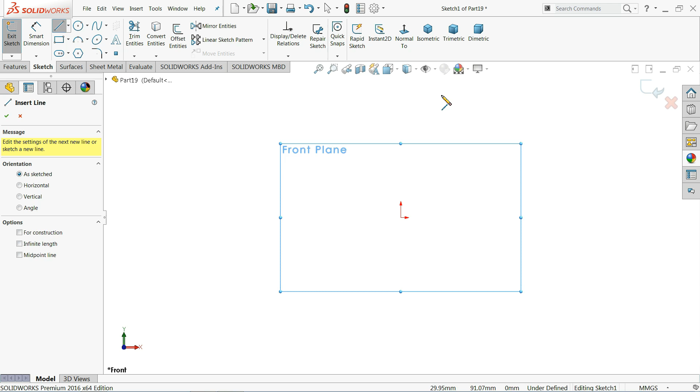Exit. Now here we will make some relation. Select these two lines and make relation collinear as well as equal. Two relations we created. The same we will do for these two lines, collinear and equal. That's it.

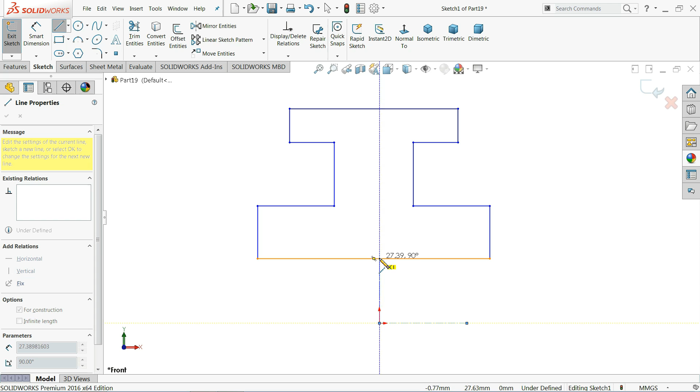Horizontal and vertical line connect with this center line. See, we connect this center point. Select this line, make relation vertical. Now this is in perfect position. Let's define.

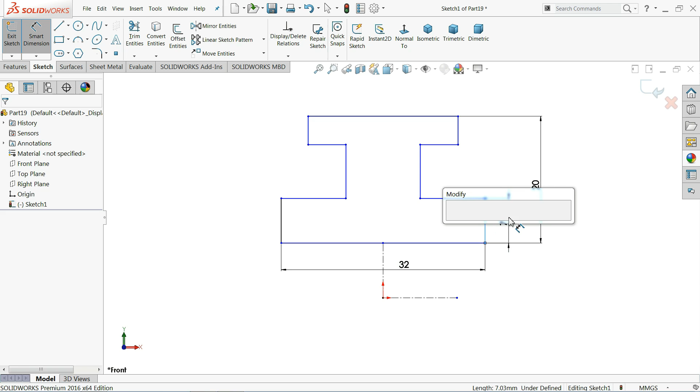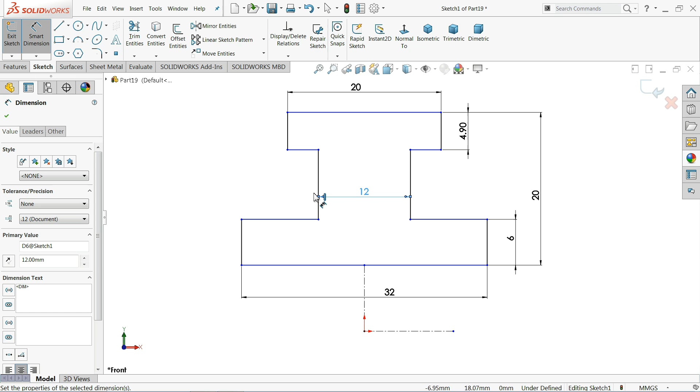Keep overall width 20 millimeter, 32 millimeter, 6 millimeter. This one keep 4.9 millimeter. That's it. And 20 millimeter. This one 6 millimeter. Okay, the middle one 12 millimeter. This one also 6.

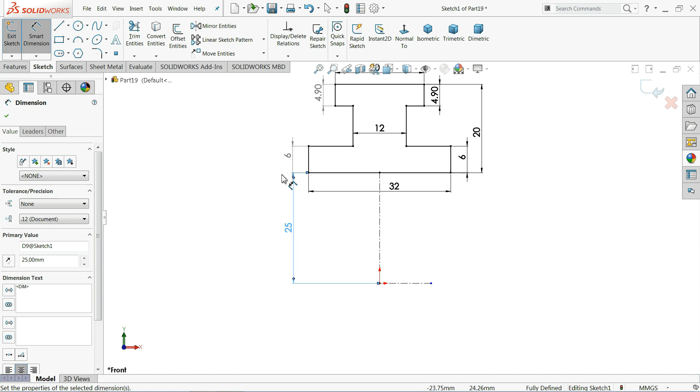Distance from here to origin point. This is the important relation, 25 millimeter. See, now see, our drawing is fully defined.

Go to feature, select revolve boss base and select this vertical horizontal line. You can see the preview. We don't want full circle, we need half circle. So here we will choose 180 degree. Keep end condition blind.

You can see the preview. Okay, look, real view. Select this face, sketch, normal, select circle, and here draw a circle.

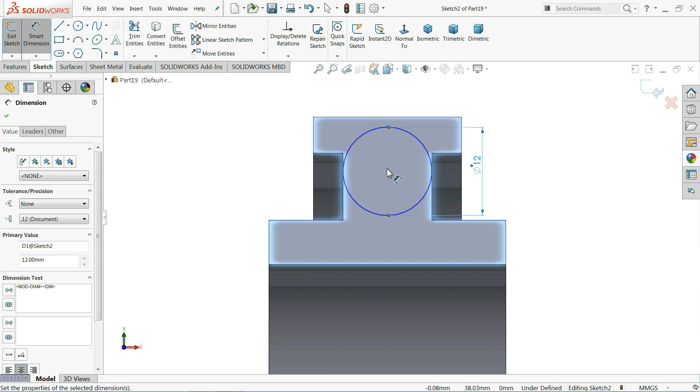Diameter 12 millimeter and distance from outer edge 9 millimeter. Okay, and let me define one important relation. Select the center of the circle and origin point and make relation vertical. Now see, go to feature and extrude.

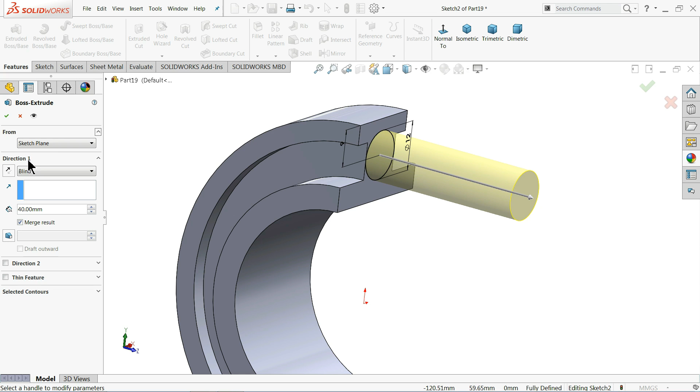Extrude up to 40 millimeter. Select reverse direction. You can see. Okay, that's it.

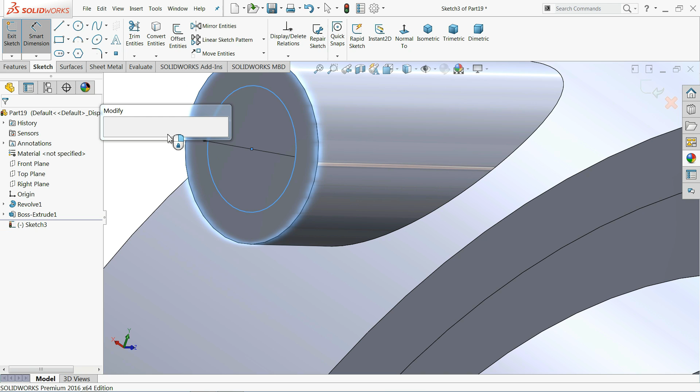Now select this face, sketch, choose circle, and here we want to create a hole. So center point, circle, smart dimension, and let me define the diameter 8 millimeter. Go to feature, select extruded cut. Now we want to make an extruded hole. Keep end condition through all. Okay. Now see, the hole is created.

Choose fillet. Keep 2 millimeter, and I'll choose this end. Okay, again I'll choose fillet, 1 millimeter radius and select this end.

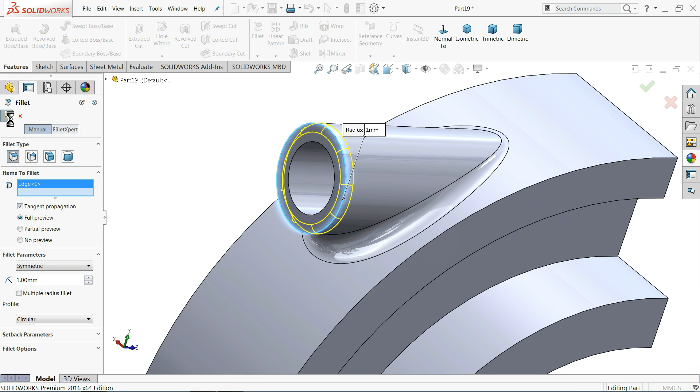Okay, now let's mirror this feature. So how we will do this one? I'll choose here top plane, mirror. First I'll select this extruded part, then I'll select this hole, then select this fillet and this fillet. Now all these 4 patterns we selected here, you can see the preview. Okay, now see, it's mirrored.

So this is your simple part 2, connecting rod lower. Let me define some material or some color.

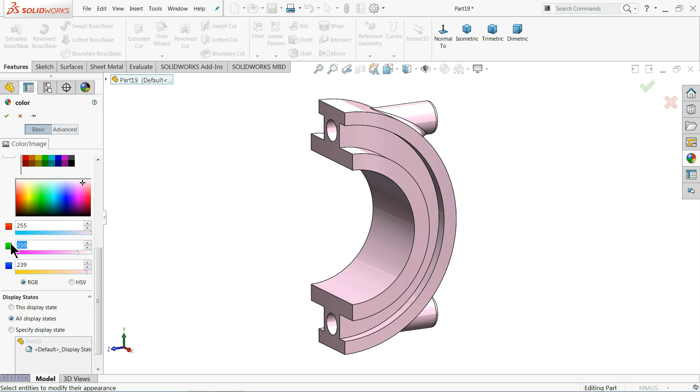255 and here 67, 19. It's like a dark orange. See? Okay. If you will check off the real view, look, it's perfect.

Save. Connecting rod lower. Okay.

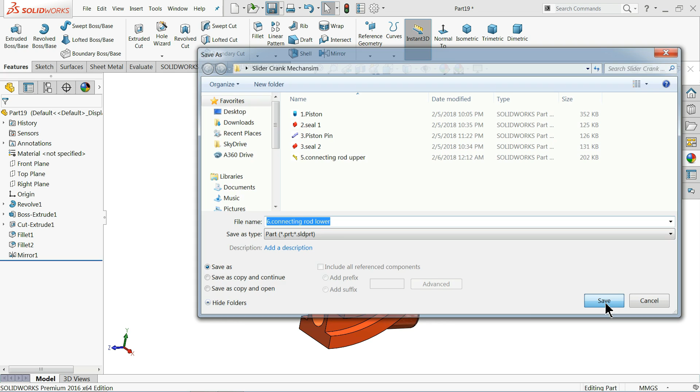Now let's make the next part, plummer block bearing lower part. So let's start. We will start with top plane. Sketch.

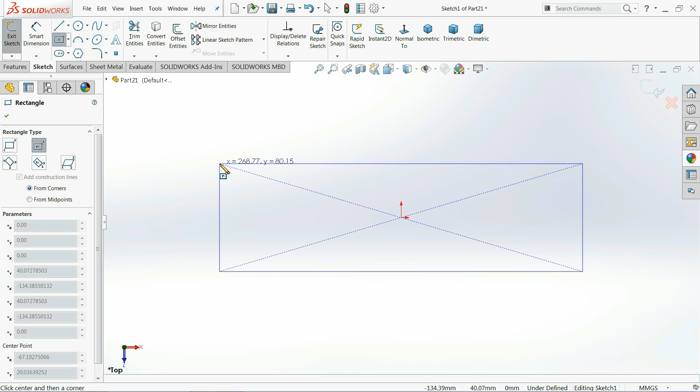Center rectangle. Draw a center rectangle and let me make the length 140 millimeter, 35 millimeter. Now extrude, and we need to extrude up to 20 millimeter.

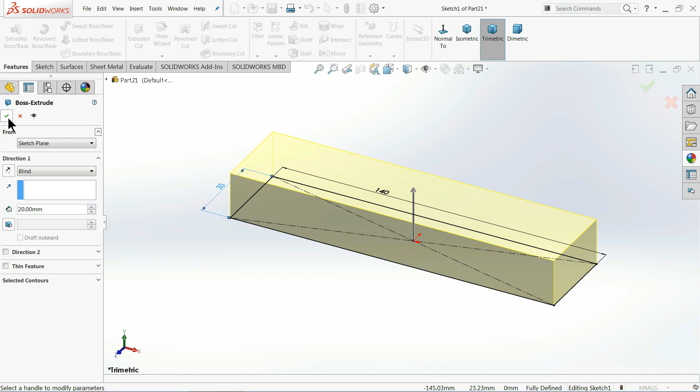Okay, that's fine. Now select this face, sketch normal, choose circle, and let me draw a circle.

84 millimeter. Okay, now select this line, convert entity, this outer line, convert entity, choose here trim entity, power trim, and drag, delete. Okay, now see this portion is created, exit.

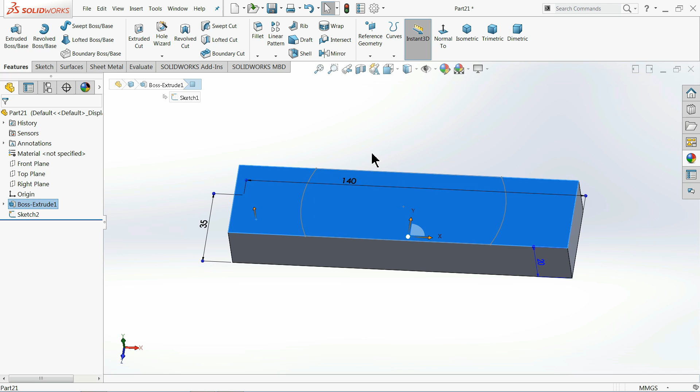Now select this plane. We want to create the same thing but 30 millimeter above this surface. Select this plane, 30 millimeter above. Okay, now select the same plane, sketch circle, and let me draw one more circle, and here let's keep the diameter 80 millimeter.

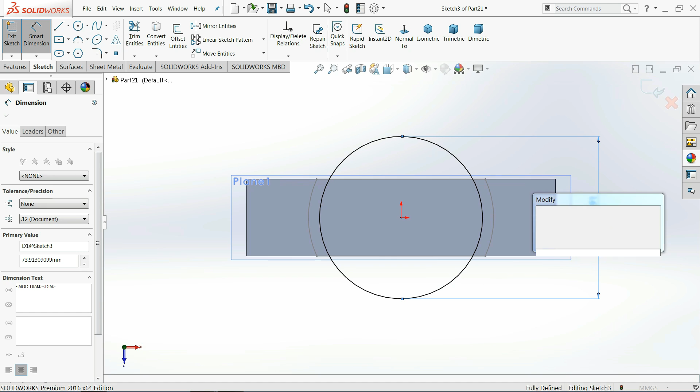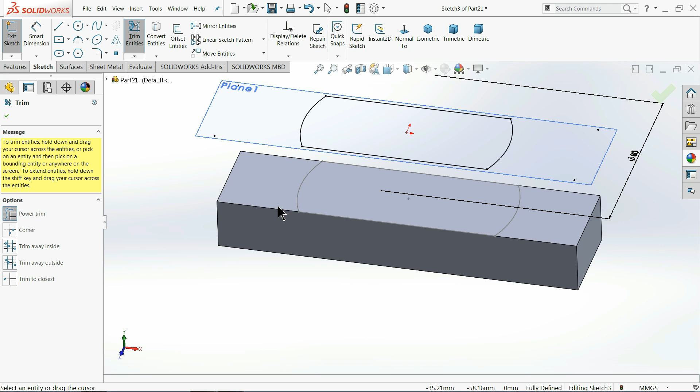Now select this face, convert entities, choose trim entity, power trim, and now see we got a beautiful structure. Okay, now exit and just go to feature, and here you will find one option, lofted boss base.

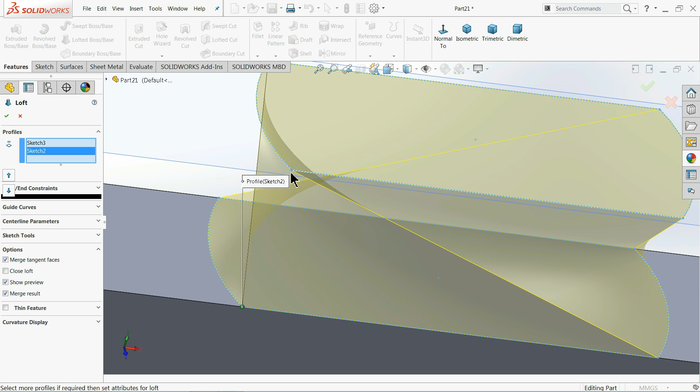Now see here one edge is selected, so select this other edge. Okay, we need to drag the edge, just drag this one up to here. See, these two edges we selected, no need to check any other things. Okay, let me hide this plane. Look, this is beautiful.

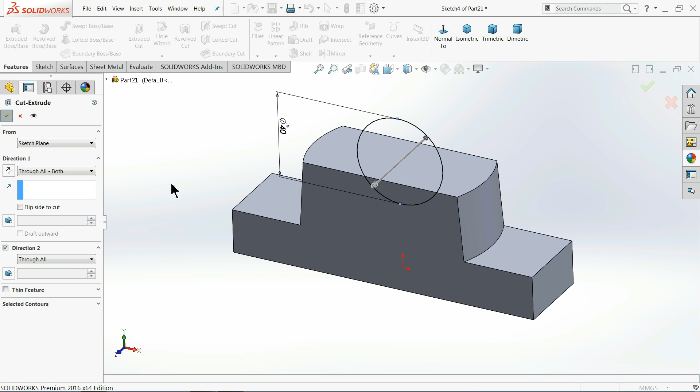Front plane, sketch normal, circle, and let me draw one circle. I want to make a hole here, so 40 millimeter. Go to select extruded cut, and here keep end condition through all both. Okay, now see it took the perfect shape.

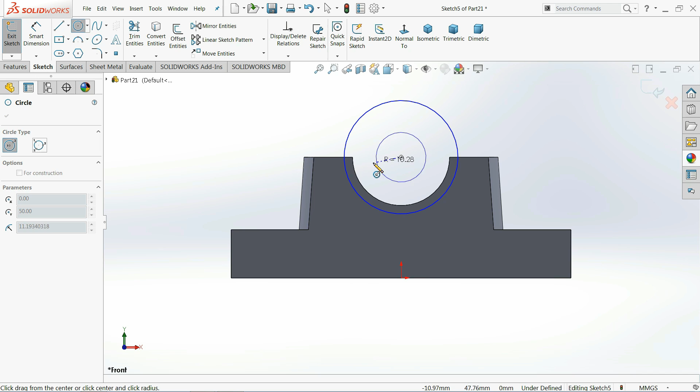Now again we will make same plane, sketch front plane, sketch, and let me draw two circles. One is similar to 40 and one is bigger, 50 millimeter, 40 millimeter. Okay,

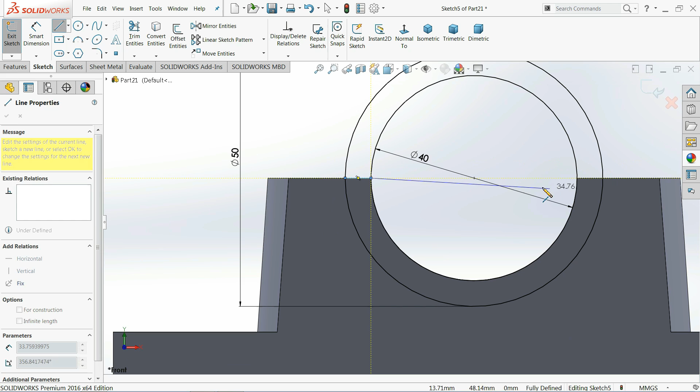Choose here line and connect these 2 points. And here also connect. Trim entities, power trim, just left key and delete.

Okay, this one no need dimension, it is fully defined. Okay,

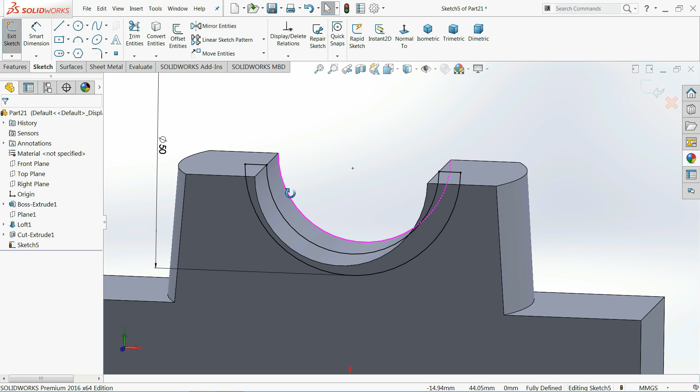Now select here extruded boss base. We extrude only 3 millimeter. Select offset and this time make 20 millimeter. No, not 20 millimeter, this is 17.5 millimeter, because our thickness of plummer block is 35 millimeter. Okay,

Now I'll choose again the same sketch, extruded boss base, offset 17.5 millimeter, make reverse, and here also 3 millimeter blind condition, end condition blind, and reverse. See, here is going this direction. Okay,

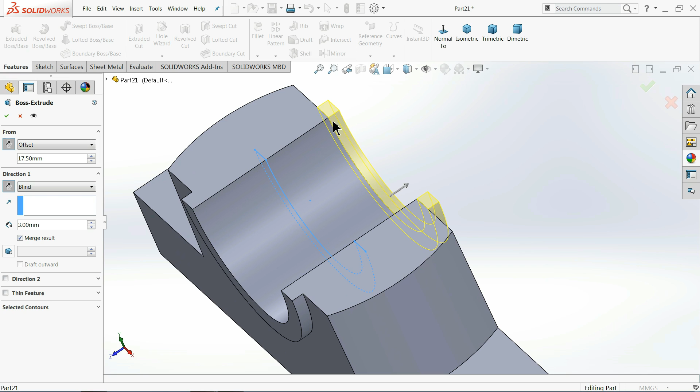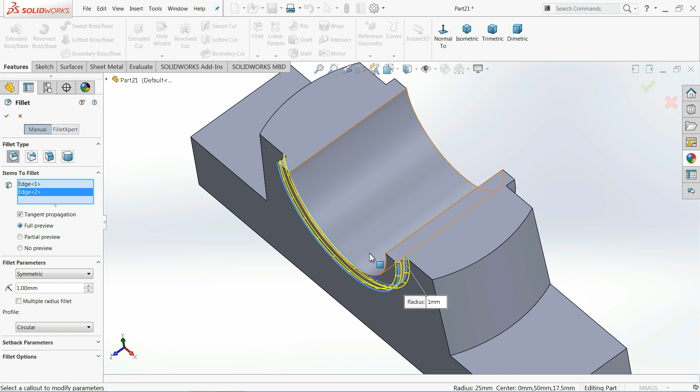That's it. This is what we like to make fillet. 0.5, and let's try these circles. Okay, let's try 1 millimeter. Okay,

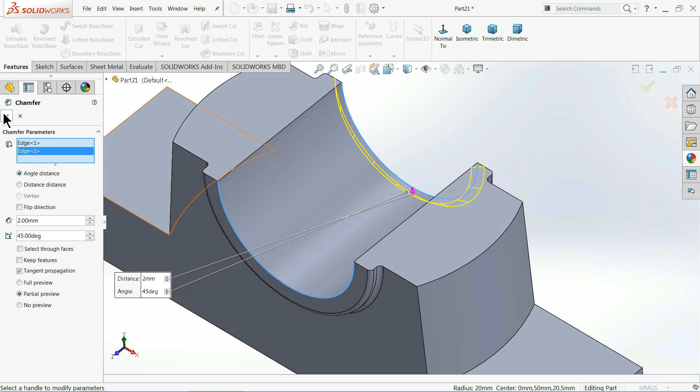That's perfect. Chamfer 2 millimeter and 45 degree. I'll select these two edges. That's nice.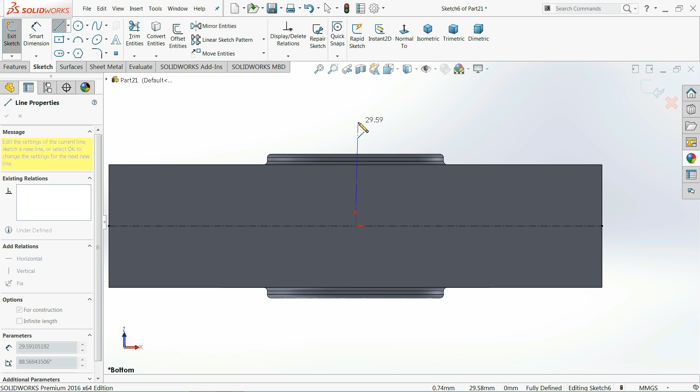Now select the bottom face, sketch normal. Now here we will make some, choose center line, draw one end to other end, and draw one center vertical line also, circle, and let me draw here 2, 1, 2.

Okay, let's draw it, no need to mirror. Smart dimension, 12 millimeter, 13 millimeter, and this one 11 millimeter.

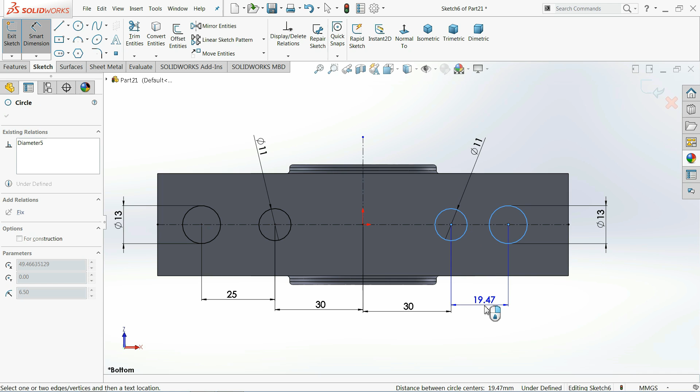Now let's make both the gap 25 millimeter. Now this distance from origin point 30 millimeter. The same here, 13 millimeter, 11 millimeter, 30 millimeter, and the same, the last one 25 millimeter. Now it is fully defined.

Select here extruded cut and keep end condition through all. See, okay,

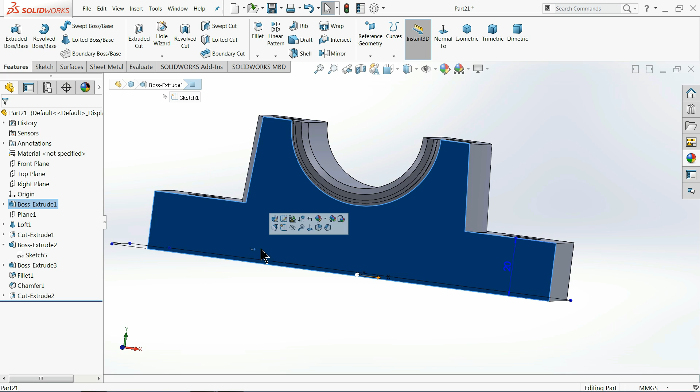That's it. Now here we want to make some cutouts, so how we will do this one? Select this, okay, this face, sketch. I'll choose here corner rectangle, exit. Now select both the upper line, collinear and equal. That's it.

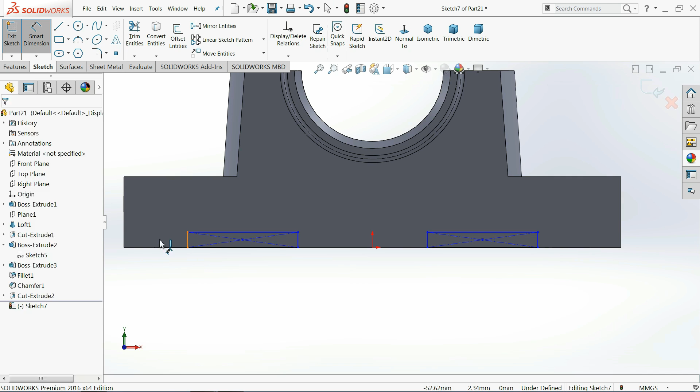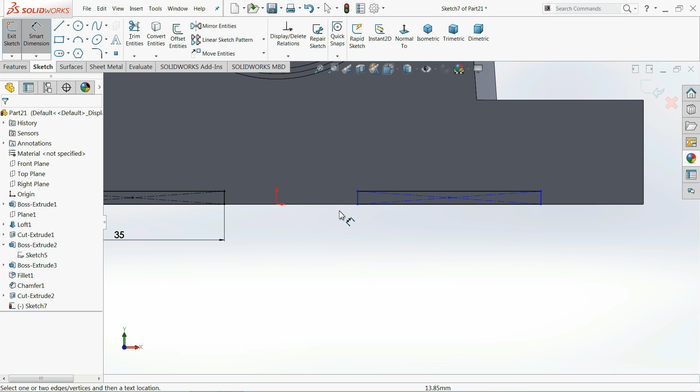Let's define this dimension. 25 millimeter, 2.5 millimeter, and this overall length 35 millimeter. Now let me, okay, this one also define from this end. 25 millimeter. Now see, it is fully defined.

So select extruded cut and here keep end condition through all. See, okay. Now see, the hole here is created. Keep real view on, plain white. Now that's look perfect shape.

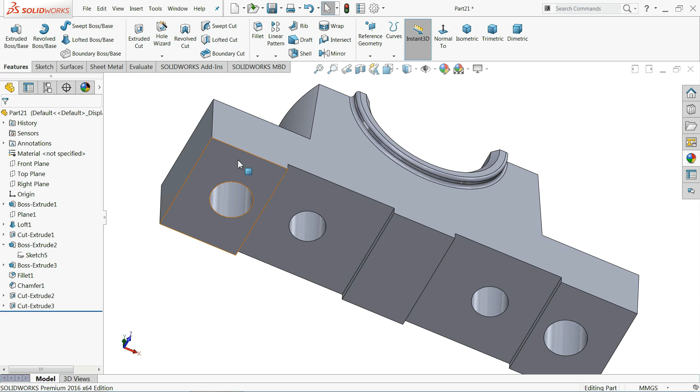Now let's start to make some holes at the bottom. Select this inside sketch normal, and here we need to make some more holes. Select circle. Here also draw one more circle. Smart dimension and define the diameter 20 millimeter.

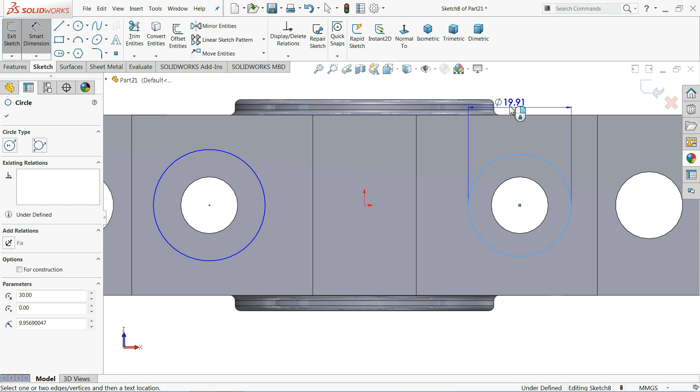Feature, select extruded cut, and we want to make a little small depth. Make cutout 5 millimeter depth. Okay, now see.

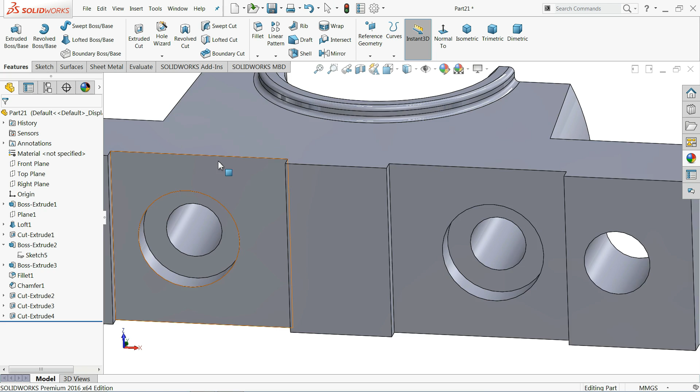Now select this top face, sketch circle, center point circle. The same thing we have to do for this - center point and circle. Now for this one, 20 millimeter.

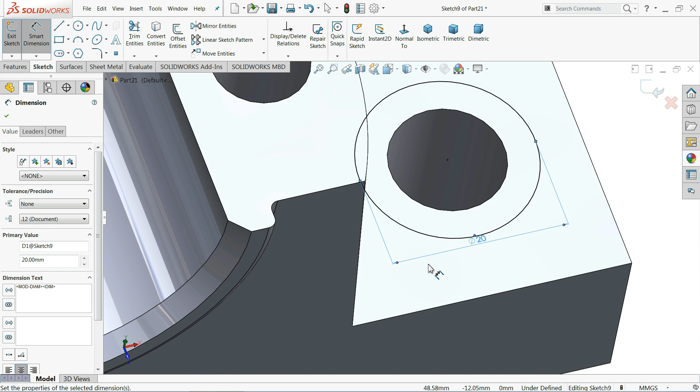Now select extruded cut, and this time we will make the depth only 2 millimeter. Keep blind and condition 2 millimeter. Okay, now that's our simple hole.

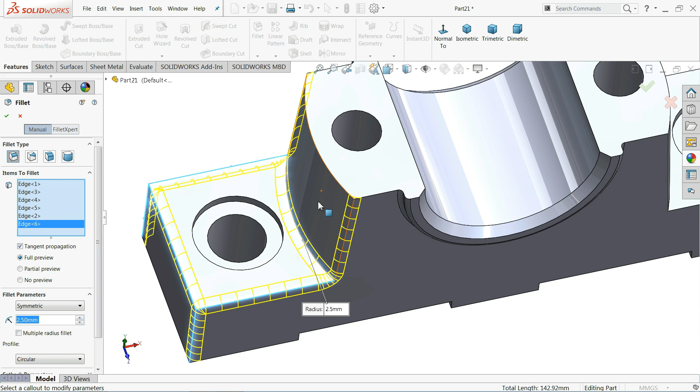Choose fillet 2.5 millimeter, and I'll select one by one. Delete. Now choose. Okay, let's, if it's going to select, then select OK.

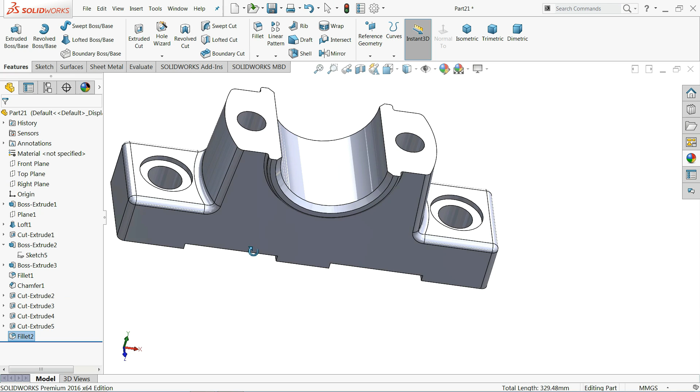See, front plane sketch. Now here we want to make some cutouts, so let me draw one center line. Exit.

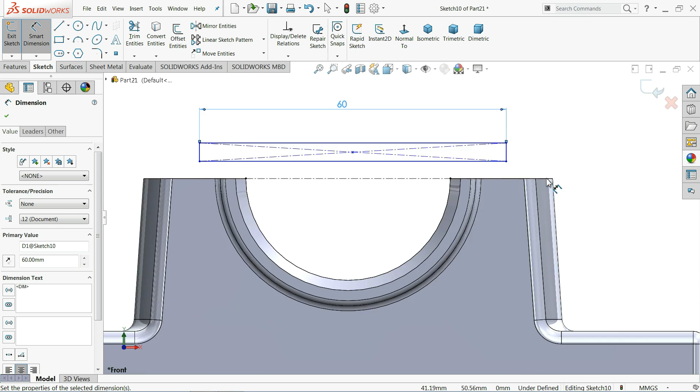Corner rectangle. Exit. Smart dimension 60 millimeter, and 2 millimeter.

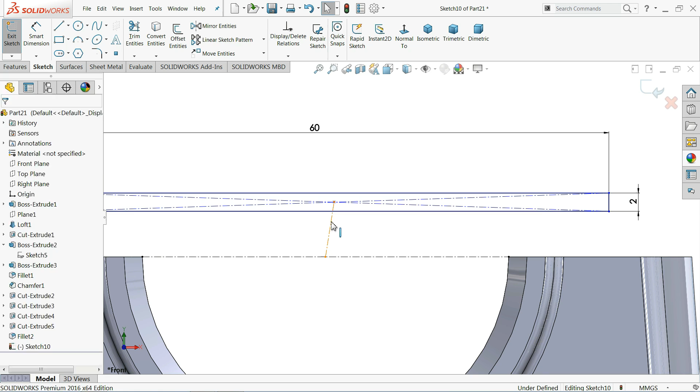Select line and find out midpoint and connect with this midpoint. Exit. Now select this line and make relation vertical. That's it. And select this line and upper line and make relation collinear. Now see, it is fully defined here.

Select here extruded cut, and here choose through all. In direction 2 also keep through all. Okay.

Now here we will make a little sketch, edit sketch, and here make the depth 2.5 millimeters. Okay, exit. Now that's it.

Now let's define some material. Actually I remember the color - 020325. This is the perfect one. Okay.

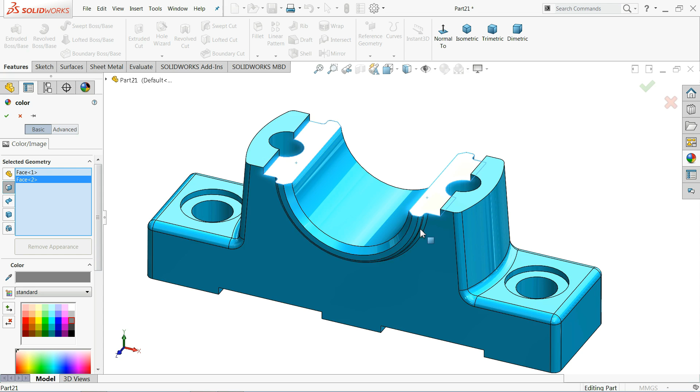A few colors we will define some dark colors so that it looks beautiful. Okay.

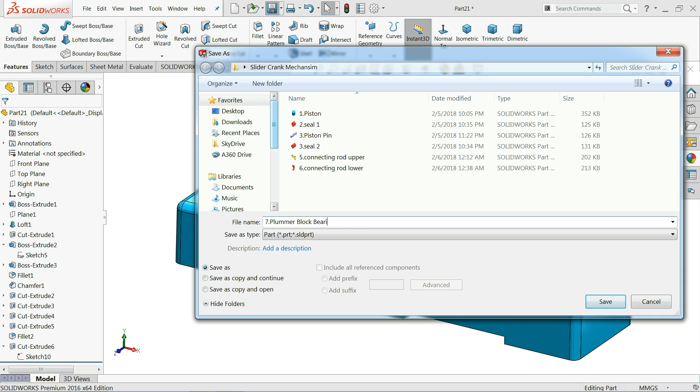Let's save this part. Plummer block bearing lower.

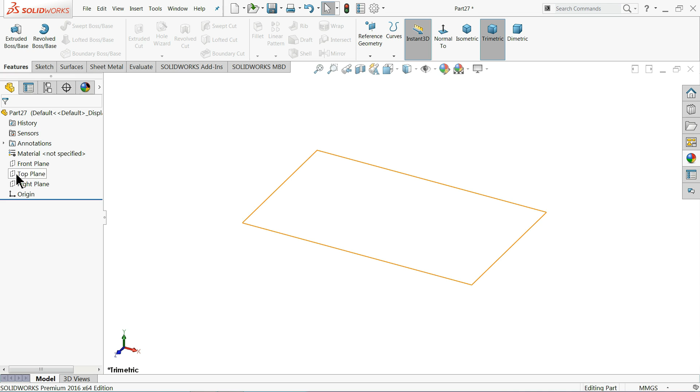Let's do this on the upper part now. Here the next part is plummer block bearing upper part. So let's start to make top plane sketch.

Now here, center line. Vertical and horizontal center line. Let me select line.

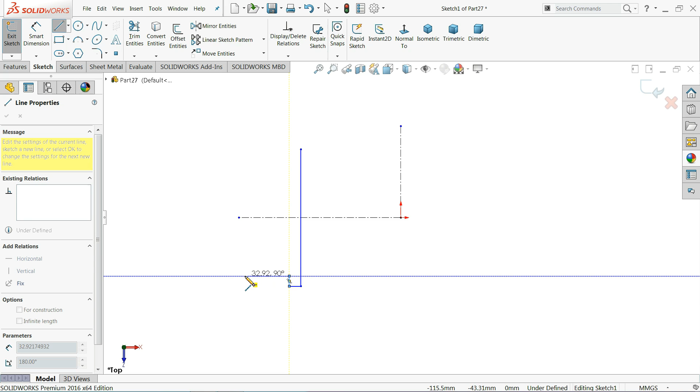Exit. Now here choose circle and draw one circle up to this point. Exit. Now see, 80 millimeter.

Now let me define the gap - 20 millimeter, 41 millimeter length, 3 millimeter. Now distance from here to this point, it is just half, 41 by 2 millimeter. That's it.

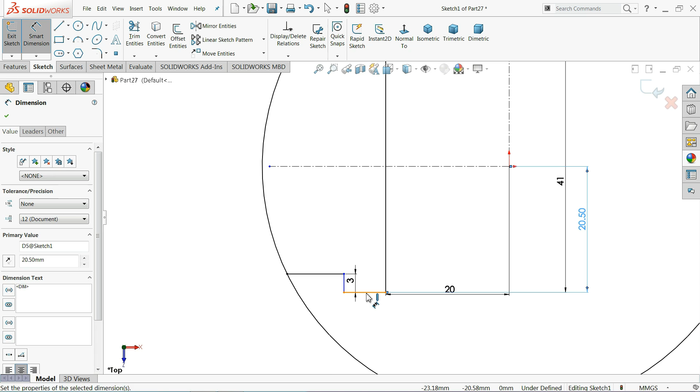5 millimeter. Now see, choose mirror entity. Now mirror these three lines against this. Okay,

Any one relation I think we need to delete. Let me delete this one. Okay, that's fine.

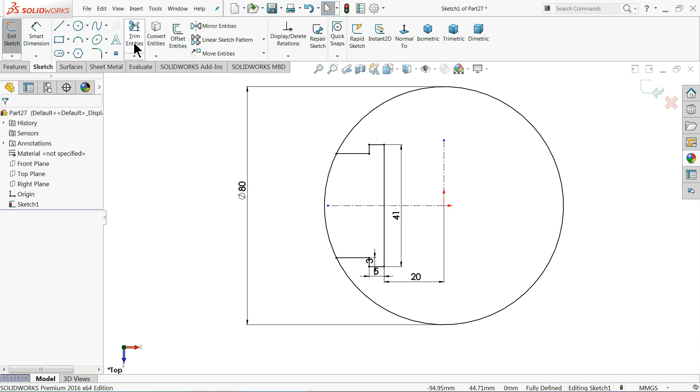Now choose here trim entity, power trim, and I'll delete this area. Okay, now that's it.

This is the simple sketch - we mentioned all the dimensions here.

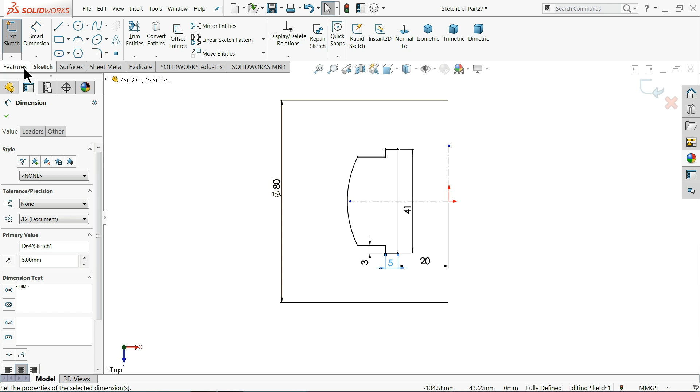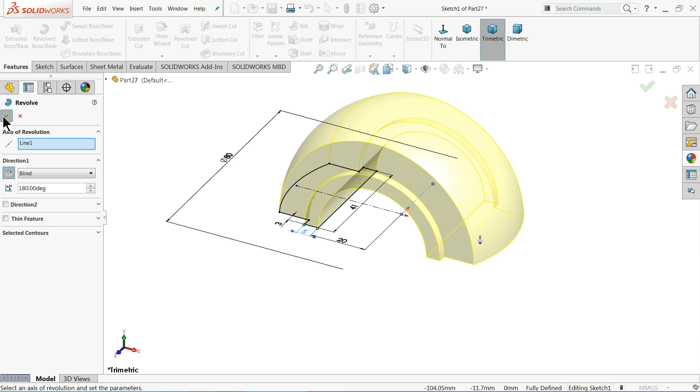Now select revolve boss base and I'll choose this line as the axis of revolution. We don't want full, we need only 180 degree. That looks fine. Or even select reverse direction, this is also fine. Okay, now that's it.

Now let me choose one plane. Select this face, choose plane, 35 millimeter flip side - see this side. Okay, now select this plane, sketch, take the normal position again. That's perfect. Choose here circle.

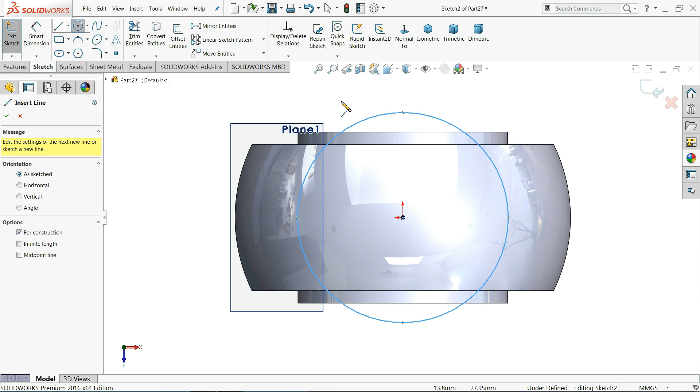Again let me define vertical and horizontal center line. Now let me define this diameter - 40 millimeter.

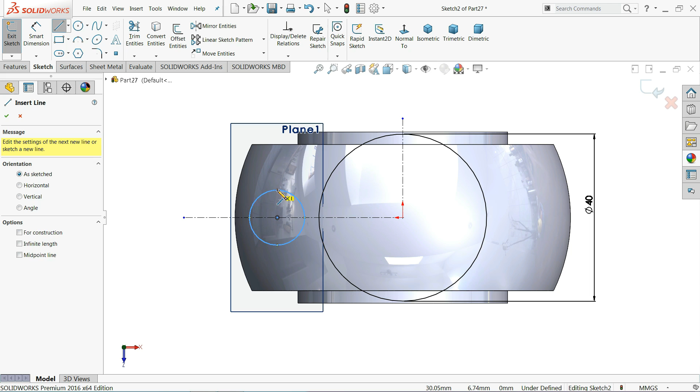Choose here circle, line, and I'll connect this line to this circle. Make sure it is horizontal from here to this - exit.

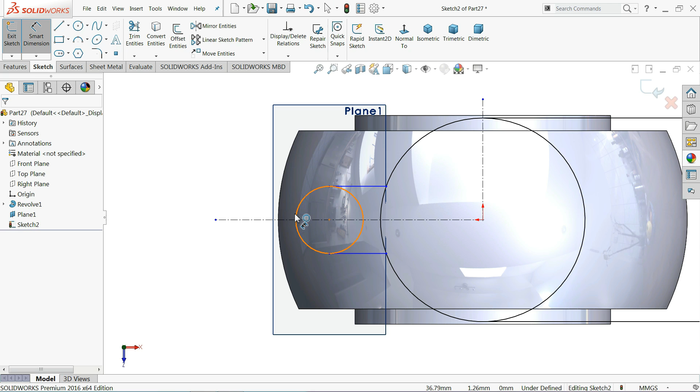Now start to define. Diameter 18 millimeter. Now distance from here to origin, 30 millimeter. Okay, choose trim entities, power trim and drag.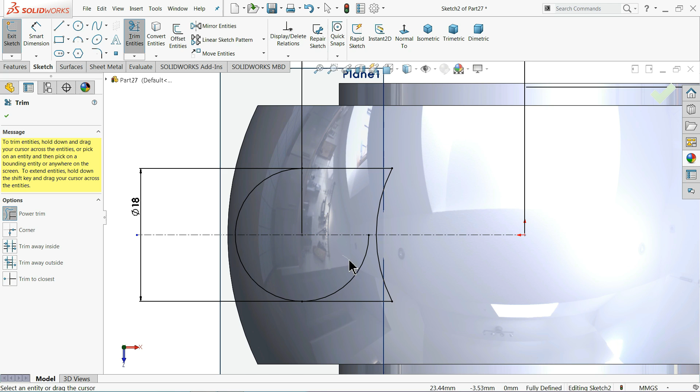Now see, now this is the shape we got.

Okay, now select extrude and here select up to next. Now you can see the preview. Okay,

Hide this plane. See, or even you can select up to surface and I'll choose this surface. This is also a kind of command. Okay,

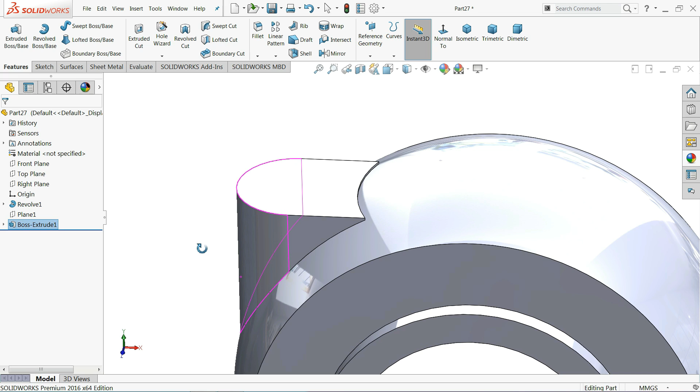That's it. See, okay, this up to surface - it took the whole surface, so edit feature and up to next is the better option.

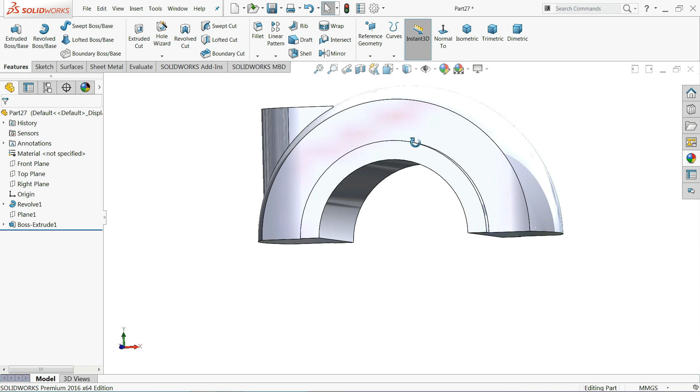Select this face, sketch normal. Now here we like to create a hole, so I'll just make a hole 11 millimeter. I'll keep this hole 11 millimeter and distance 30 millimeter.

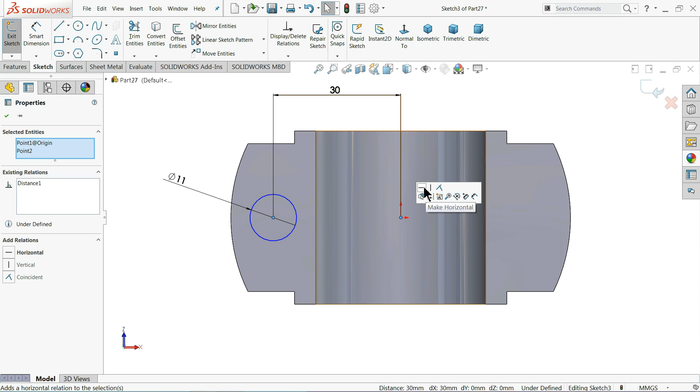Okay, and make one important relation - select both the center point, origin. Now select extruded cut and keep end condition through all. Okay,

See, it's time to mirror this feature. So how we will mirror this one? Let me choose right plane, mirror. First I'll choose this body, then this inside hole. Okay, now see, it is mirrored.

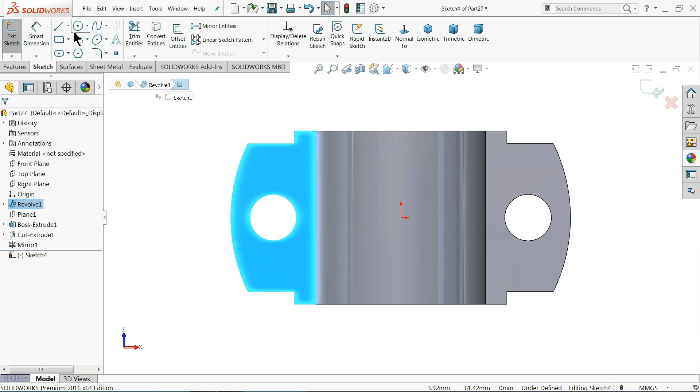Again this face, sketch normal, circle, and let me draw a center circle and keep the diameter 6 millimeter. Go to feature, select extruded cut and keep through all. Okay, that's it.

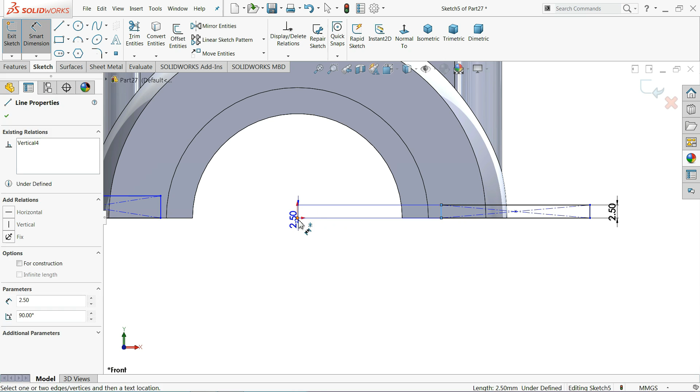Now the hole is created. Now here we need to make one cutout, so we will go for front plane, sketch, corner rectangle. I'll draw. Okay, let me define.

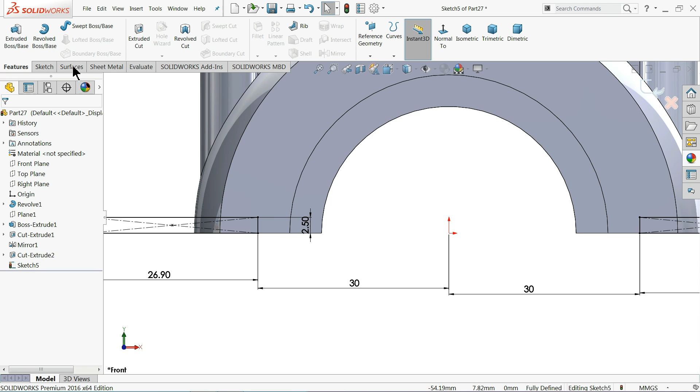2.5 millimeter overall anything, and distance from origin point 30 millimeter. Okay, and go to feature and select extruded cut. Keep end condition through all both. Okay,

Now see, chamfer 2 millimeter. I'll choose these two edges. Okay,

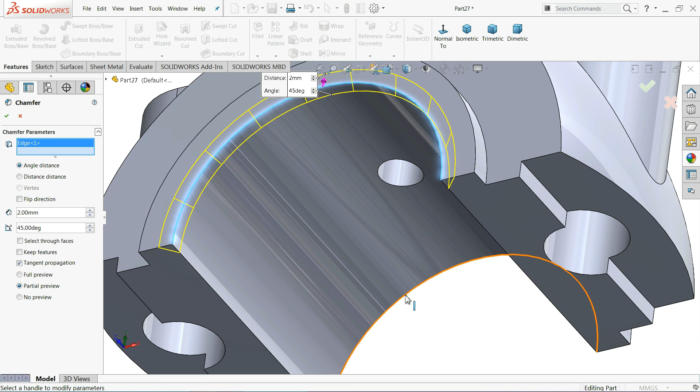Chamfer 2 millimeter, inside, and this outer one the same to the other side. Okay, that's perfect.

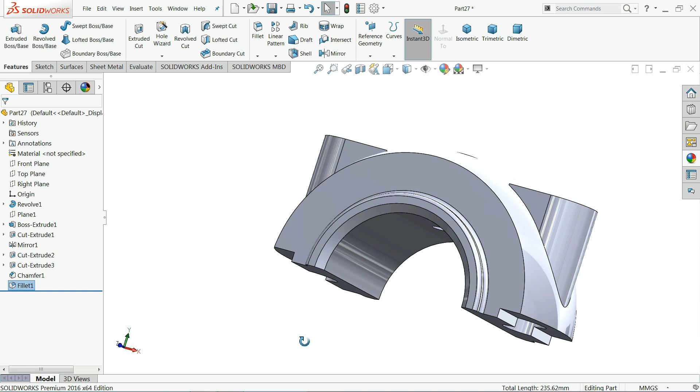Now let me do some more things. Okay, let's define the material or color.

I love this color - 101, 255. Okay, it looks beautiful.

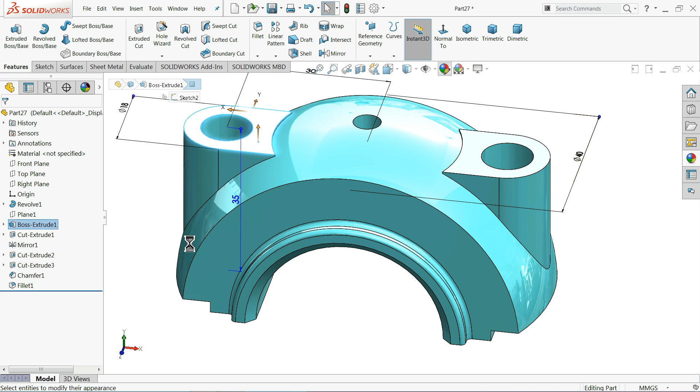Even if dark color, okay,

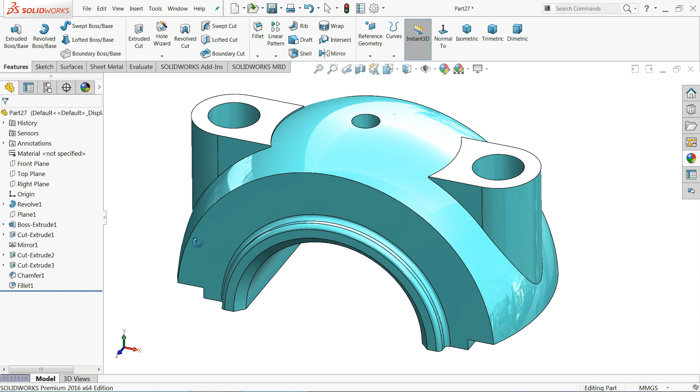Let's save the part - plummer block bearing upper part. Now let's make the last part.